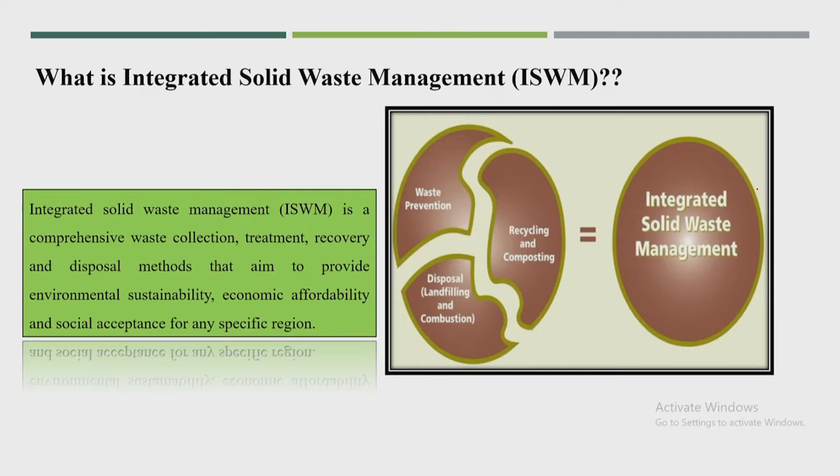First, what is the meaning of integrated solid waste management? It is a comprehensive waste collection, treatment, recovery and disposal method that aims to provide environmental sustainability, economic affordability, and social acceptance for any specific region. So these are a few important ideas about integrated solid waste management.

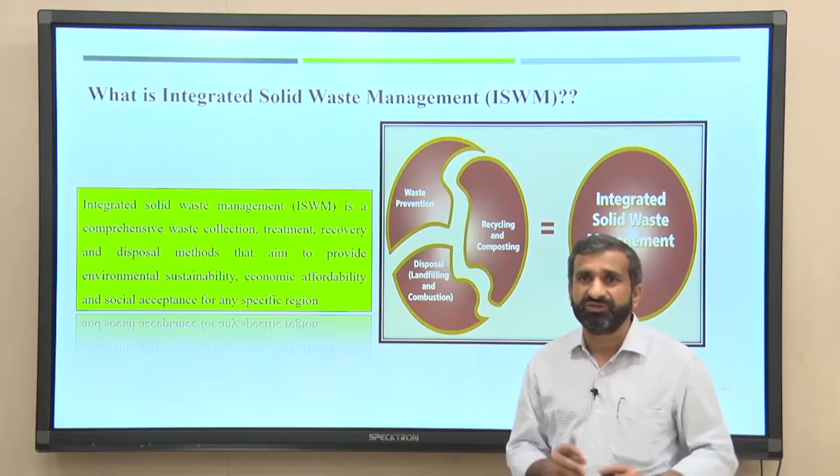It includes all the physical elements of municipal solid waste management based on environmental sustainability and economic viability, and finally it should be accepted by the local areas, socially also it should be accepted. This is called the integrated solid waste management system.

When you talk about the idea of integrated solid waste management strategy, it includes the entire issues about the solid waste management system, starting from the cultural, technical, economic, social context, and after that it also includes the waste material, what kind of sources, and different stakeholders.

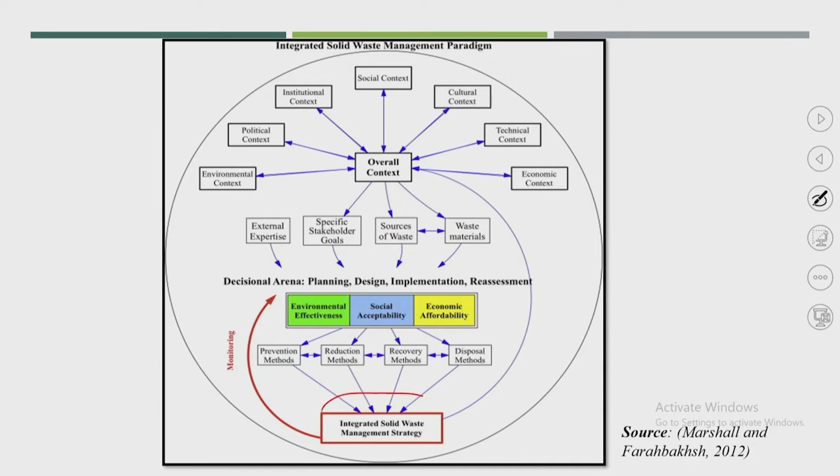Finally, it will go to the planning, designing, or implementation of the integrated solid waste management plan, and that has to be accepted on three bases: environmental, social and economic constraints. Based on that, how best we can prevent the waste, reduce the waste, recover, or dispose the waste, that is normally called the integrated solid waste strategy.

So what is the ISWM or integrated solid waste management planning process? Normally it will start from identifying the need, reviewing the existing system, reviewing the existing regulations available in the particular region, city or state, and then organizing the decision making framework by calling the different stakeholders, and then finally establishing the objective.

Once the objective is finalized, try to identify the potential component. Once the objective comes up, we can go for treatment processes like biological or chemical treatment. Then see the potential component of that, compare the different options available, and based on that develop the integrated solid waste management plan.

Once the plan is ready, try to implement it as best as possible, and then evaluate the complete waste management system. If you are not achieving the particular objective, or it is not possible to achieve, then again go through the same process. So likewise we can proceed for integrated solid waste planning.

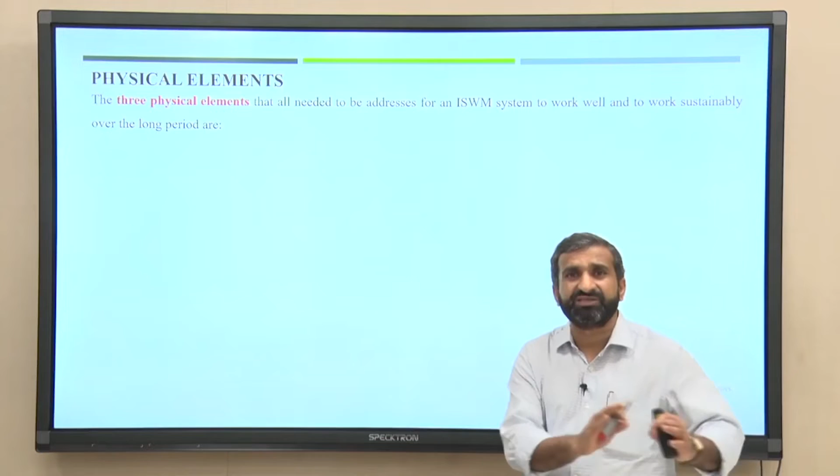Now, when you talk about the integrated solid waste management plan, system or strategy, normally we discuss 3 physical elements and 3 governance features. So there are 6 features or elements that need to be discussed under the integrated solid waste management plan, strategy or process. First we will start with the physical elements.

There are 3 physical elements that need to be addressed. The first is public health. Now, the benefit of ISWM is normally called proper collection. But rather than calling it collection, why not call it public health? So the objective could be how best we can protect the public health of the local people.

So how we can maintain public health properly by maintaining healthy conditions in urban locations, particularly through good collection services. Suppose house to house collection systems are available, as started in the Swachh Bharat mission - that is the best kind of primary and secondary collection. But if you have poor collection or storage, it is not good, and because of that lot of public health issues will come up.

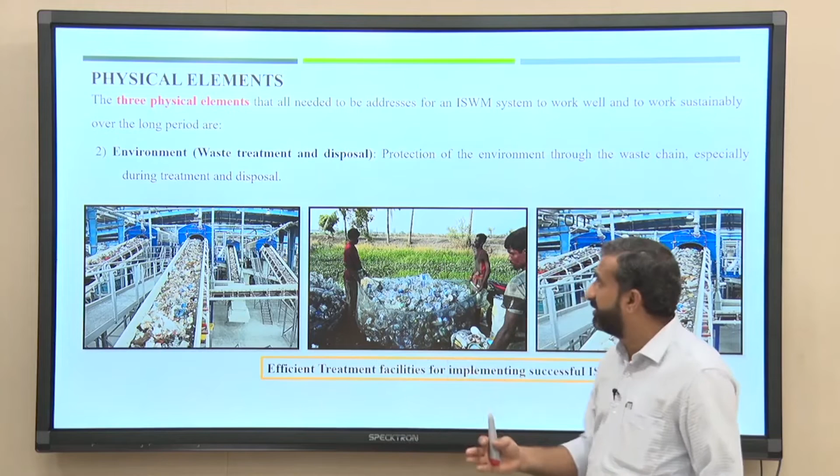Next is the environment - how best we can maintain it. This environmental condition will be maintained specially by waste management, waste treatment and disposal. If you are able to treat properly all kinds of collected waste and also dispose of the entire waste properly, then it is good for the environmental conditions in the local area, protecting the environment through the waste chain, especially during treatment and disposal.

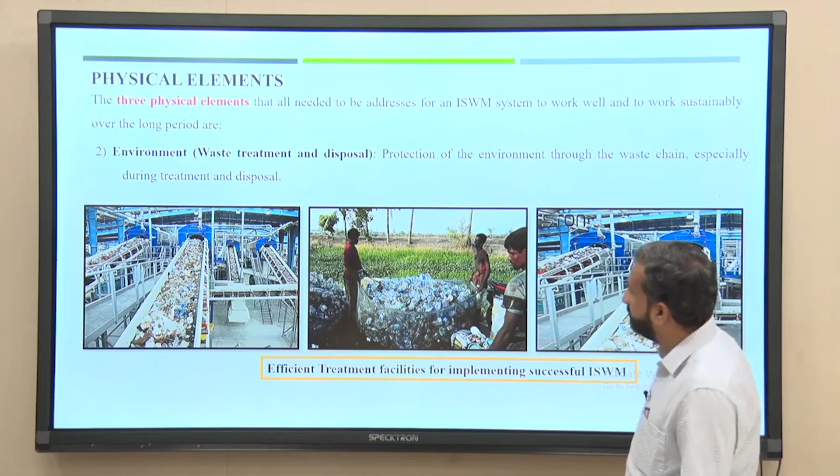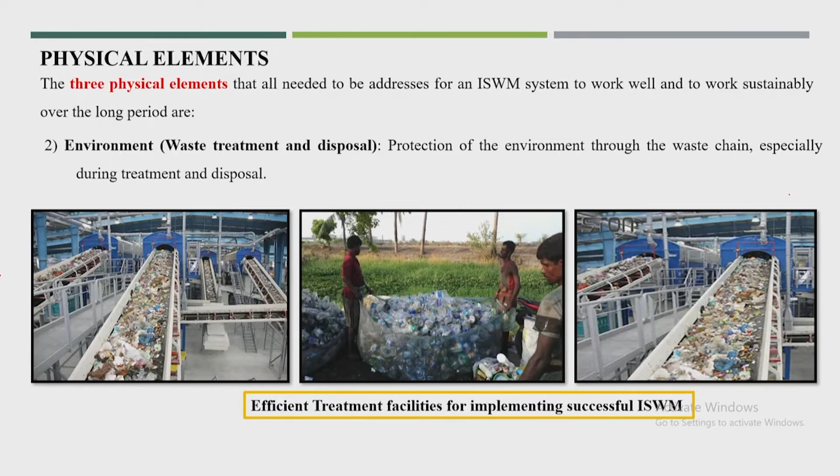So if you have proper recycling processes, which I showed in some photographs, proper treatment processes, proper sanitary landfill facilities available in the city, then we can easily maintain the environmental condition in the local area.

And the third point is resource management. This is also one of the most important physical elements of ISWM, and this resource management could be possible through proper recycling of dry waste and also getting products from organic material.

In this, if you talk about the 4 R's, normally we know the 3 R's which I am showing in the next slide. The 4th R is about closing the loop by returning both material and nutrient to beneficial use, through preventing waste and striving for a high rate of organic recovery, reuse and recycling.

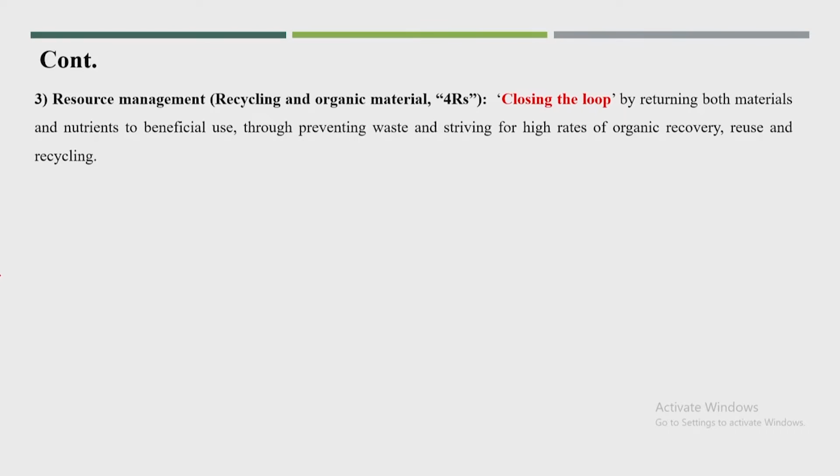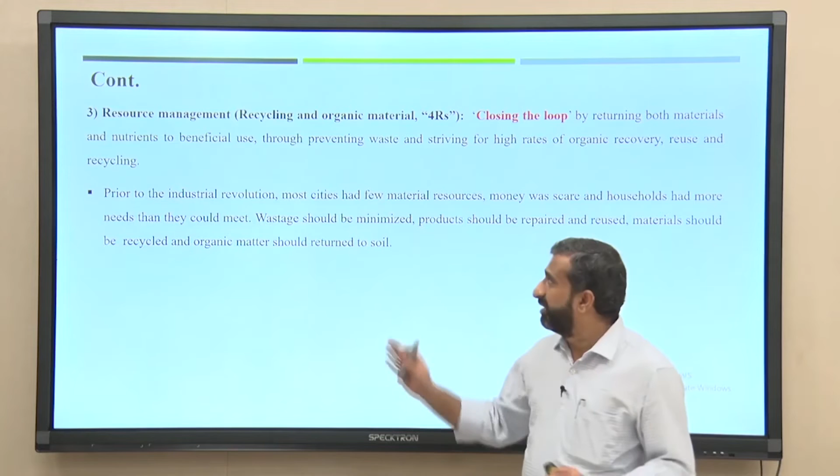These physical elements - normally when you talk about the solid waste management plan, we talk about collection, treatment, and disposal. But these physical elements are not complete until you talk about resource management, because there is a lot of material that is recyclable, and a lot of material can be treated to get a product out of it. That is the important one.

Now when you talk about treatment, always think about how best you can get some kind of resource out of it. For example, most dry matter like metal, glass, paper, rubber, leather is recyclable, and becomes a very good resource. Most of these materials are also combustible, so you can get energy out of that - that is also another very good product or resource that will be generated.

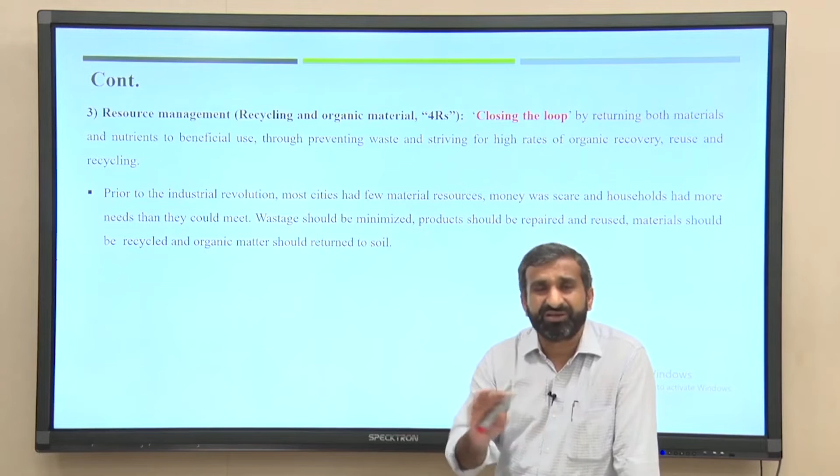And when you talk about biological treatment processes, in composting we will get very good quality compost if you manage a proper composting plant. In anaerobic digestion, you will be able to produce methane gas - this is also a very good renewable energy we can produce from the anaerobic digestion process. So almost all treatment processes or recycling processes will be able to produce a resource.

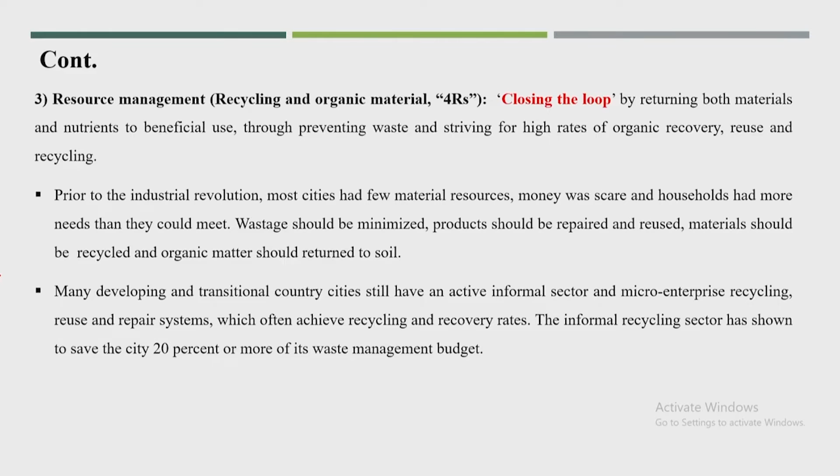Normally this resource management in most cities is not done by the formal sectors like the corporation, because they are all busy with collection and disposal only, and that kind of fund is also not available with them. But with the Swachh Bharat mission, most cities got a good amount of fund, so we will see many cities come up with treatment facilities or proper disposal facilities.

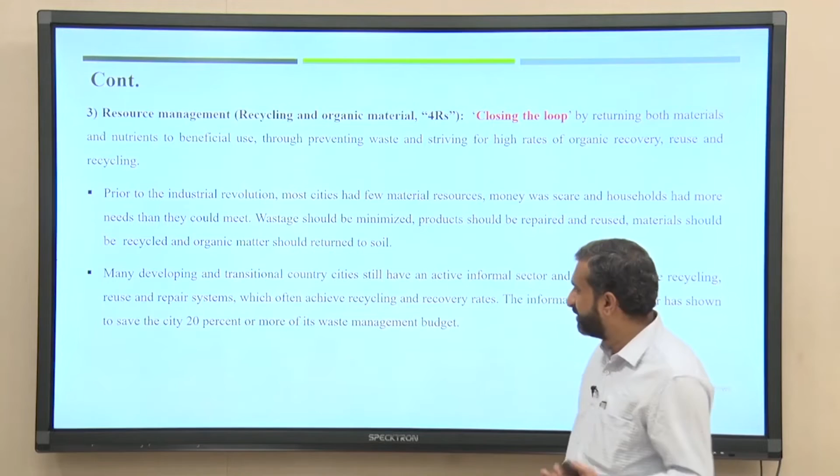But right now the informal recycling sector saves around 20% of the waste management budget, because there are a number of recycling facilities available from the informal sectors.

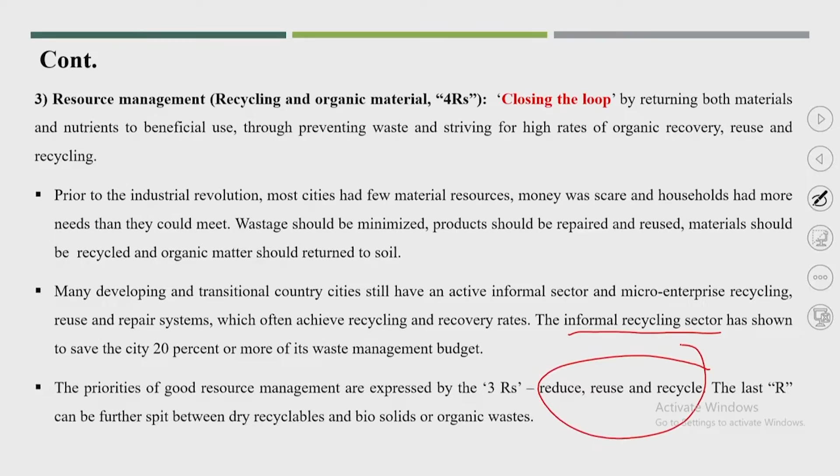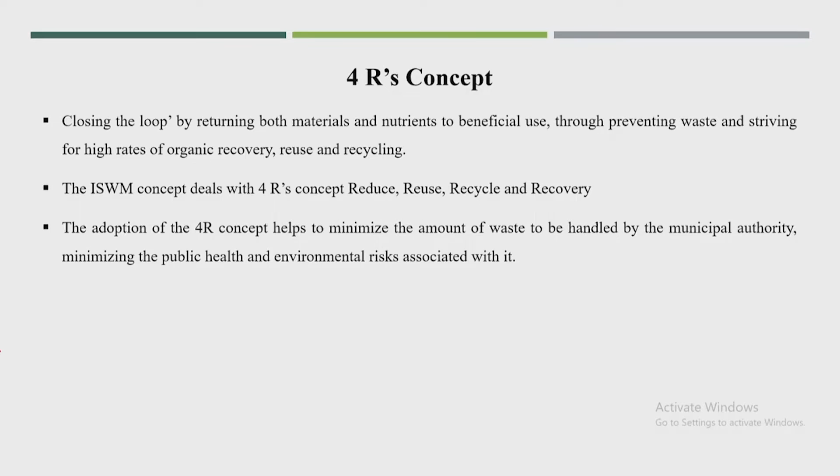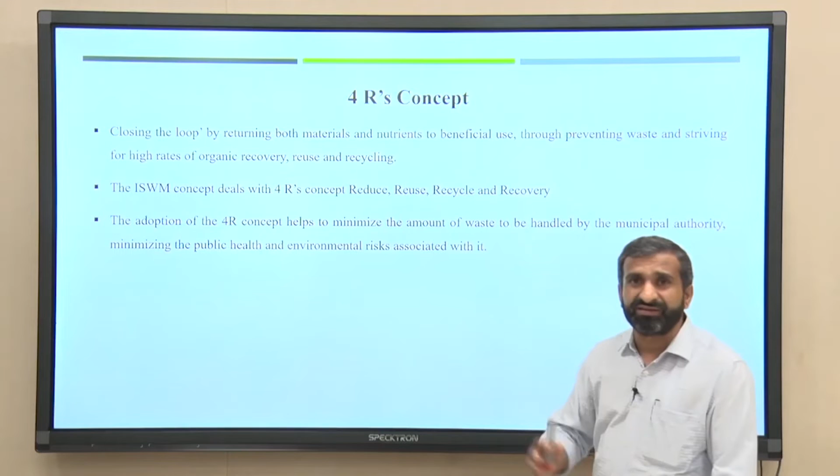So the 3 R's are reduce, reuse, recycle - that is the 4 R concept. Normally this 4th R is specially given for developing countries, especially like India - closing the loop by returning both material and nutrient to beneficial use. So the 4 R's: first is reduce as much as possible, reuse as much as possible, and recycle. And the 4th R specially closes the loop by returning material or nutrient to beneficial use - this R is specially, in many textbooks you will find, written as recovery.

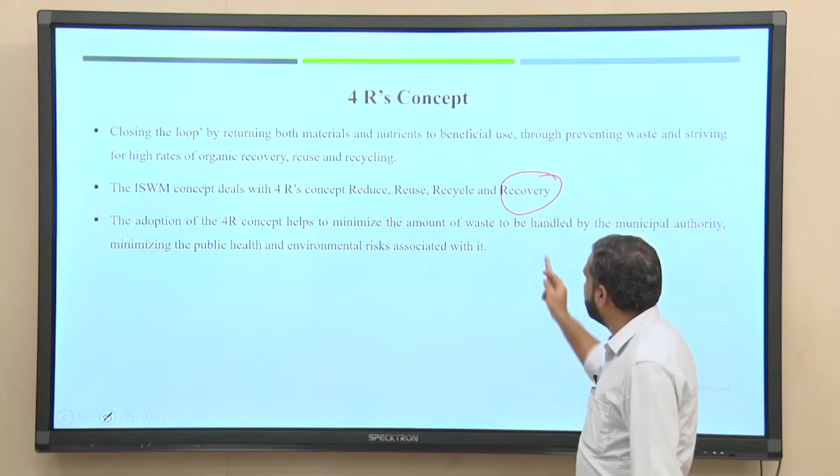I put it here because most textbooks have this as recovery, but recycle is also one kind of recovery. Rather, the important thought for developing countries like India is that R stands for return nutrients to soil. I think that is the best word for R.

What is the definition of return nutrients to soil? How will the nutrients be returned to the soil? By producing compost from wet waste. This compost has lots of nutrients, and these nutrients get returned to the soil, because the same waste was generated from the soil, and nutrients were taken from the soil to become food for humans. So why not return the same nutrients to the soil?

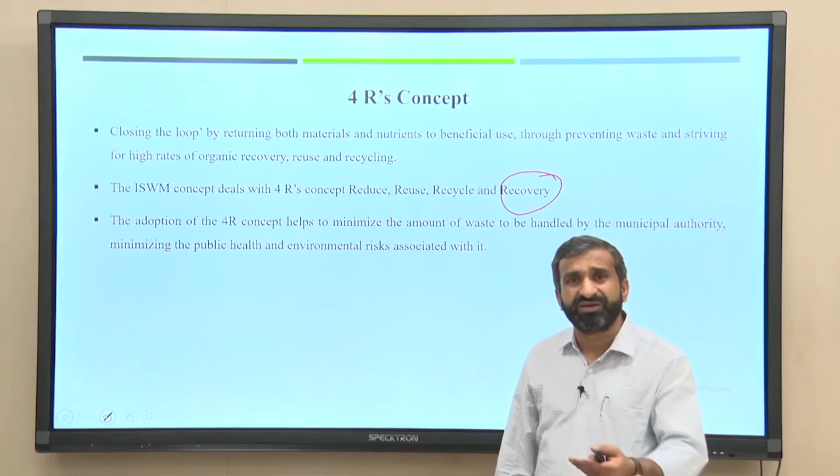This is a good idea for developing countries like India, even South Asian countries or African countries. This kind of idea is very important to propose. So it's reduce, reuse, recycle, and return nutrients to soil. By composting we can easily return these nutrients to the soil, and it will close the entire loop.

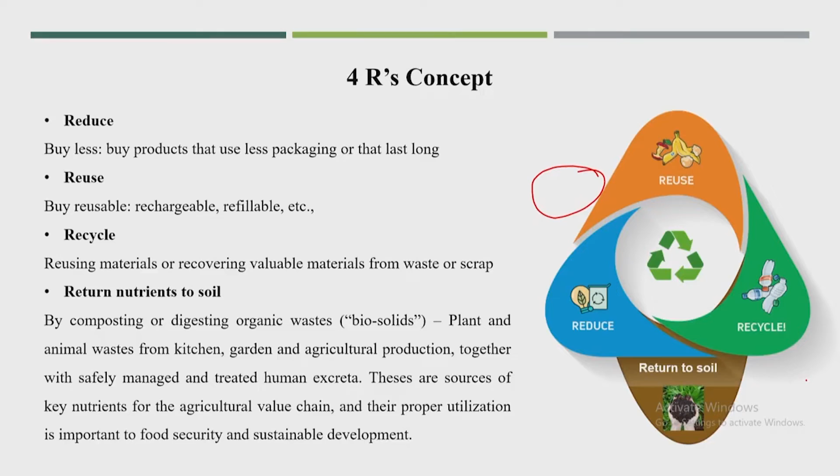Now, the governance features - there are three governance features. The governance strategy to deliver a well-functioning system of ISWM until the 1990s would probably have been framed primarily around technology, but there is a need for governance and government participation also, and some governance features are important.

Even in the 90s we always talked about technology - we required special technology for treatment of mixed waste. We never used to talk about governance features being important for a proper management system. So this is good waste governance - there are three major governance features. First is inclusive, providing transparent space for stakeholders to contribute as users. Next is financial sustainability, and third is sound institutions and proactive policies.

Now understand that whatever plan you make, it should be inclusive. What is the meaning of inclusive? It means it should be contributed to by all the stakeholders. This is one of the very important points.

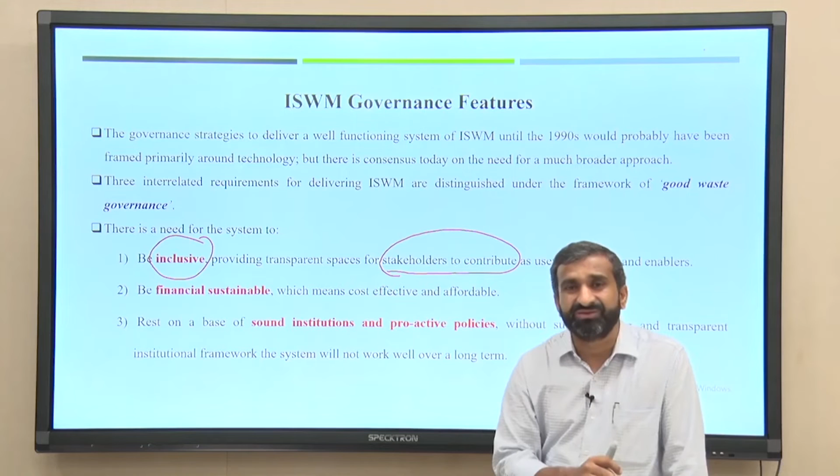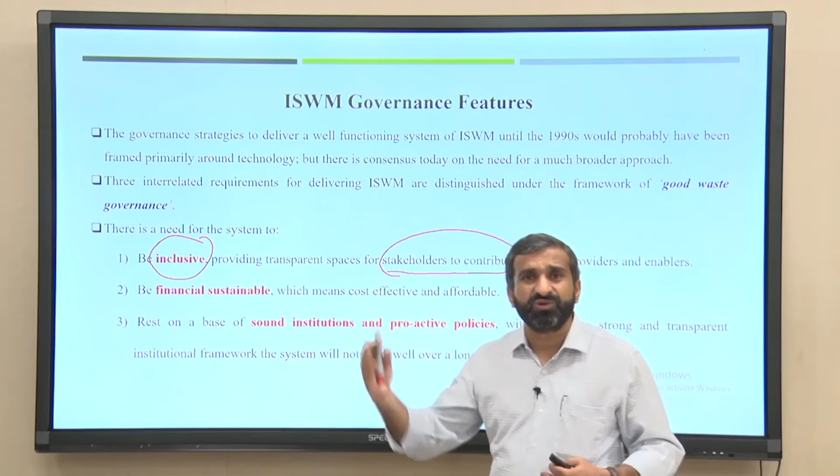So you require this, and the problem is that a lot of manpower is involved in solid waste management programs, but is that manpower skilled? No, they are learning by working in the plants, so they do not have skill. For skill you require special institutions to create skill in that manpower, and we also require special proactive policies, so that every year some fund gets to the local authority. It's not that once in 15 or 20 years you give one capital fund, maybe a few crores, and ask the local authority to start some plants and run it for the next 20 years - that is not possible, because continuous funding also should be available. Until the local authority achieves sustainability, you need to fund them, and particular policy should be required.

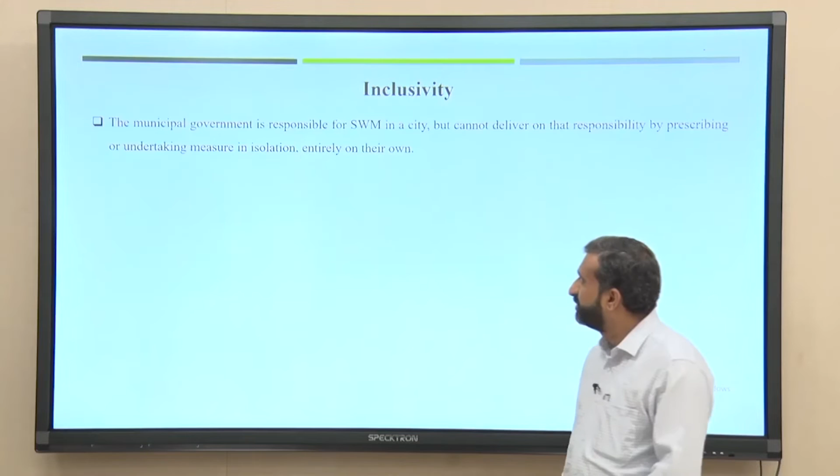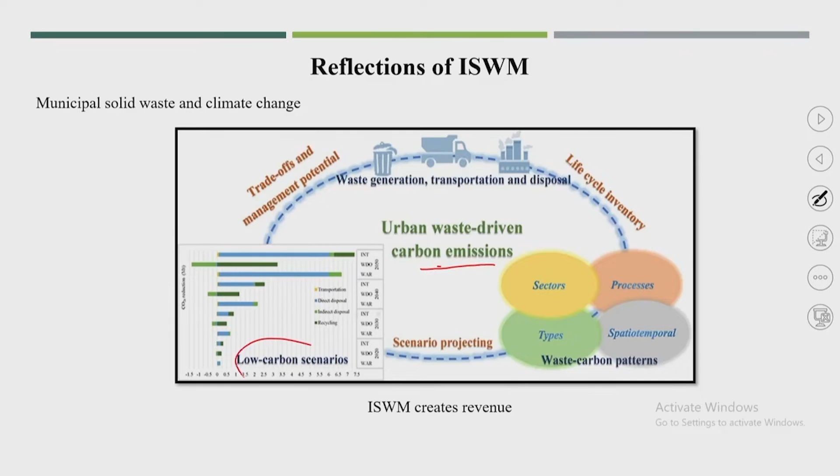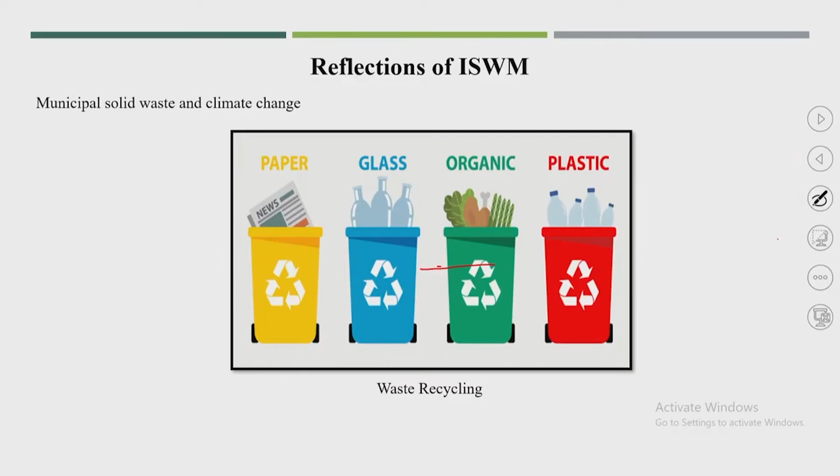Now there are some reflections of ISWM with municipal solid waste management and with climate change also. Obviously, if you have a proper solid waste management plan or integrated solid waste management plan, you can reduce carbon emissions, and because of that we can get a lot of fund by the low carbon scenario, and through waste recycling. So we can maintain proper climate change mitigation by waste recycling, by capturing landfill gas, so that it will not create problems for the environment.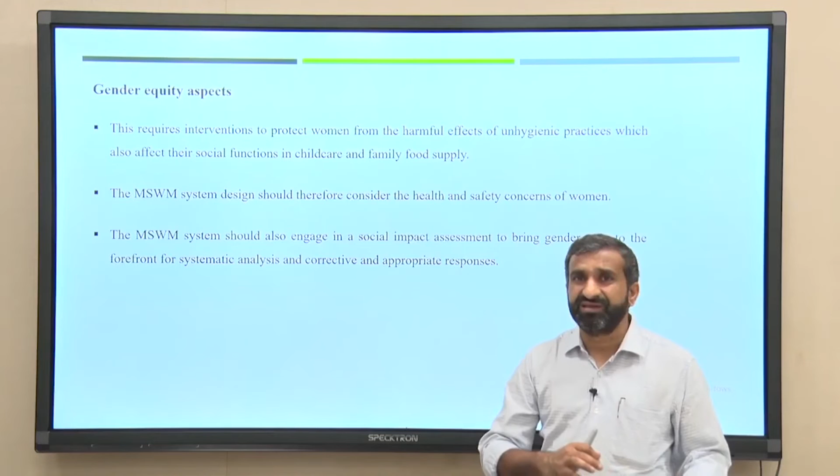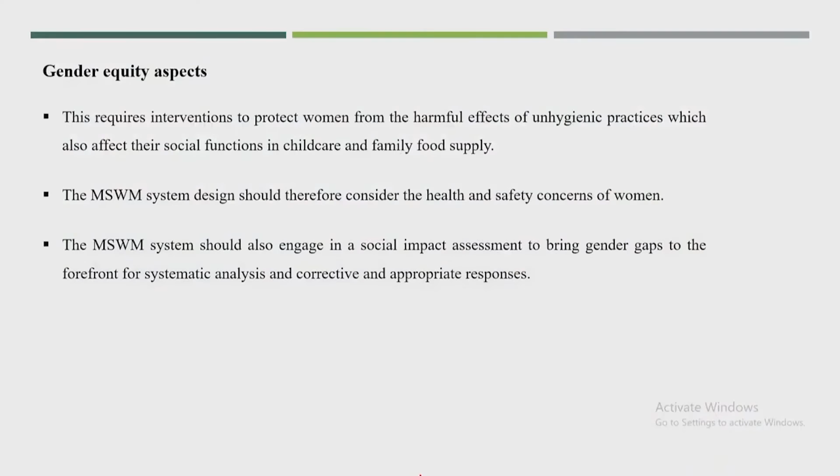Now this slide is for gender equity aspects. I keep this slide here because in the informal sector, especially, you see a number of females working in solid waste management, and even kids are working in the solid waste management system. So under integrated solid waste management, it needs to be designed in such a way that proper gender equity aspects can be maintained. It should not be that only males work for waste management and females don't, or that only females work for street sweeping and are not allowed at disposal sites. It should not be like that - try to maintain female equity, since there are a number of manpower working in solid waste management projects.

Similarly, the informal sector integration - this we have also seen in the governance features, inclusive. So inclusive is not only government participation, or government companies or government authorities participating only, but also the informal sector should be integrated, like NGOs, CBOs (community based organizations), self-help groups, some private sector. Now in 2006 when these PPP projects started under the JNNURM program, this discussion had also started.

So when you say PPP projects, it means public private partnership. Public means a local authority or local government, and private means a private company. Now when this discussion had been extended, the question came up: is this collaboration only between the corporation and the private company? What is the role of other stakeholders like generators, household people, or enablers? They also need to be included.

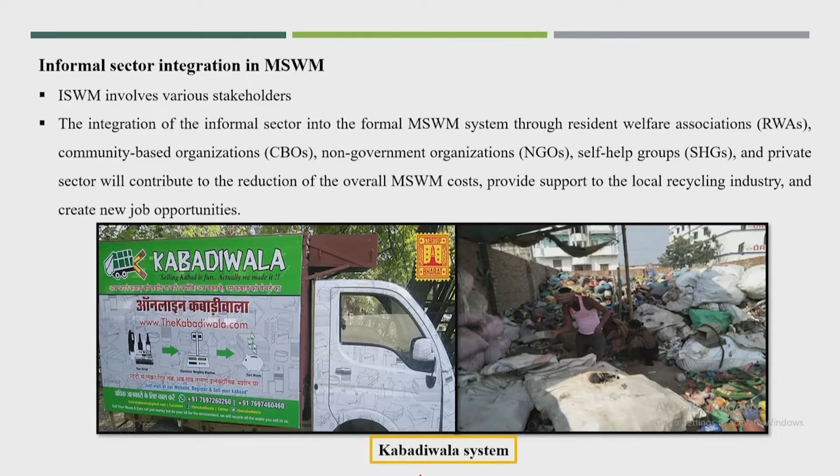So likewise, here the kabadiwala system - there are a number of kabadiwalas. Why not include such people as well? Also, there's news that waste pickers held a public hearing to raise issues.

Now, when you talk about the hierarchy of integrated solid waste management, what should that hierarchy be? This is the most preferred to least preferred hierarchy for an integrated solid waste management plan. First is source reduction and reuse - this is the most preferred point, followed by recycling. When you make a plan, first think about how best to reduce or reuse the waste. That should be the first thought for local authorities when planning for solid waste management.

Then, how best they can go for recycling of all valuable matter. Once whatever is possible to reduce, reuse and recycle is done, then you talk about composting - taking out biological waste for composting, or biogas facility, anaerobic digestion. Then finally go for waste to energy if possible, from which we can get some energy - even biomethanation or anaerobic digestion can be proposed under waste to energy. Finally, landfilling, which is the least preferred. Whatever is not possible for source reduction, recycling, composting, or waste to energy goes to the landfill area.

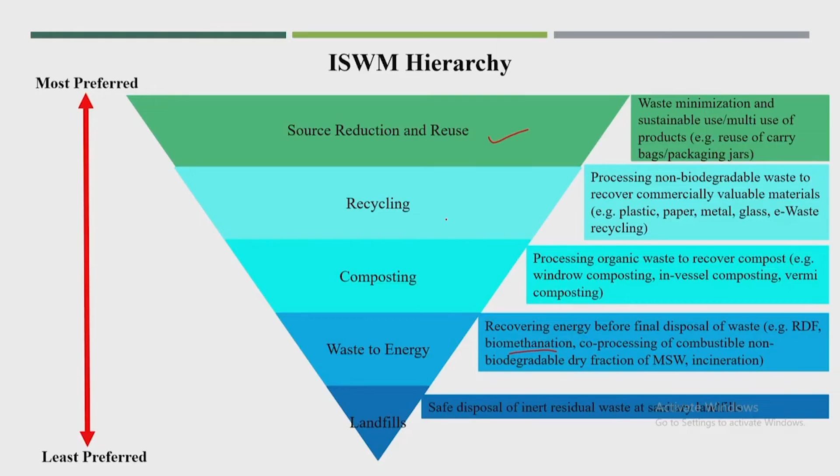That is the proper hierarchy of the integrated solid waste management strategy or plan. But in India, rather than discussing this, we directly go for landfill. So the most preferred option becomes landfill, and then we talk about recycling, composting or waste to energy. That is not a good idea.

If you talk to them about the preparation of a solid waste management plan, many of their staff are not well aware of this kind of plan preparation. So this approach will help those corporations where proper staff are not available to understand, and this way they can come up with a particular plan.

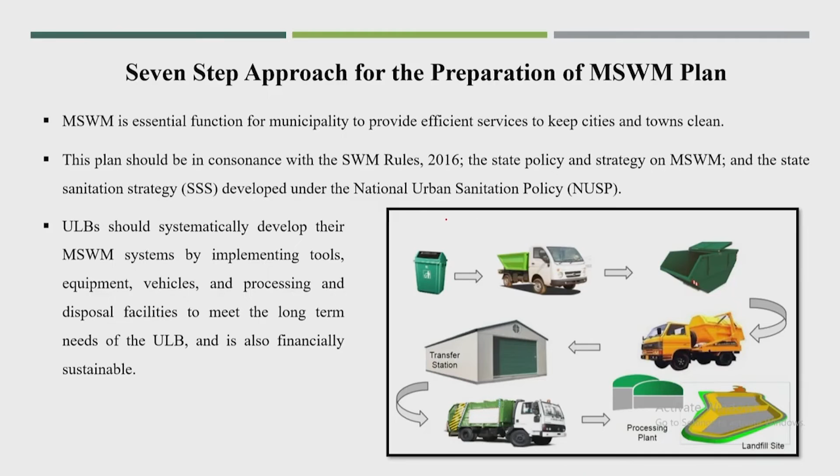These plans should be along with the SWM Rule 2016 and the state sanitation strategy developed under the National Urban Sanitation Policy. So ULBs should systematically develop their MSWM system by implementing tools, equipment, vehicles, processing and disposal facilities to meet the long term need of the ULB, and it should also be financially sustainable. So these are the different steps.

Step 1 is policy, program and legal framework. Step 2 is assessment of current situation and gap analysis, along with the stakeholders given here. In step 1, what will be the stakeholder? In step 2, assessment of current situation, gap analysis - what are the stakeholders or what aspects have to be looked upon in this particular step. Third is...

Step 3 is stakeholder consultation for MSWM planning. So once you come with the assessment, current situation, gap analysis, you come to the stakeholder consultation, and based on the consultation you come up with the preparation of a draft MSWM plan, where with population forecast and different rules and regulations, you can come up with the draft proposal.

Once the draft proposal is ready, they need to go through step 5, schedule for implementation - timeline, manpower, financial viability will be prepared. Once the draft proposal with the schedule is ready, we again go for stakeholder consultation, back to step 3, and have discussion there with all the stakeholders. Once everything is accepted by all stakeholders, we go to step 7, municipal council approval for the MSWM plan and implementation, including PPP.

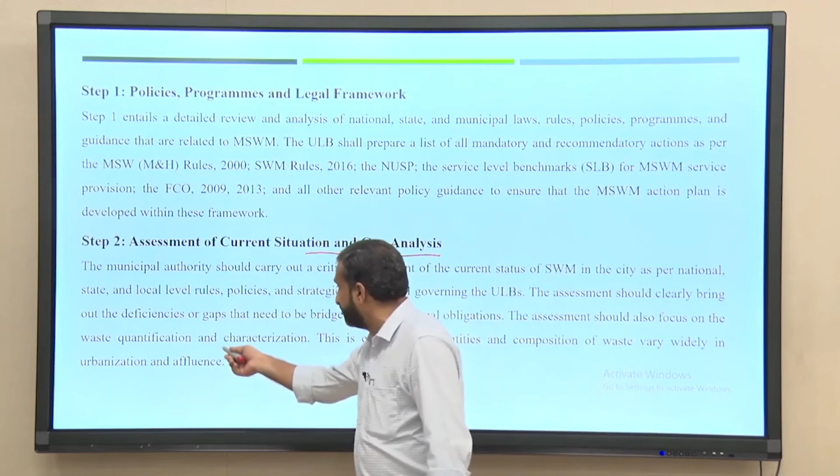To assess the current situation and gap analysis, I particularly believe each corporation needs to talk with some experts - these could be from private industries or from academic institutes. There are a number of academic professors in IITs, NITs, or other central or state colleges where researchers are working. I believe this is needed because a lot of data has to be collected, and quantification and characterization studies have to be performed in this particular step. Otherwise it is very difficult to understand what the current situation is, gap analysis is not possible, and the characterization also becomes very difficult.

We had one module on characterization. So obviously, if the local authority involves some academic faculty or professors, it is good for them also - a lot of discussions and new understanding will come up in this step. Once step 2 is known, we can go to stakeholder consultation and tell them: this is what the current situation is, and as per current situation, we come up with particular gaps.

Gaps could be like, we do not have a treatment facility, we do not have a sanitary landfill available, and the current situation shows the waste is highly biological in nature, which could produce good quality product through composting or biological treatment facility, and we also require a special facility for the sanitary landfill.

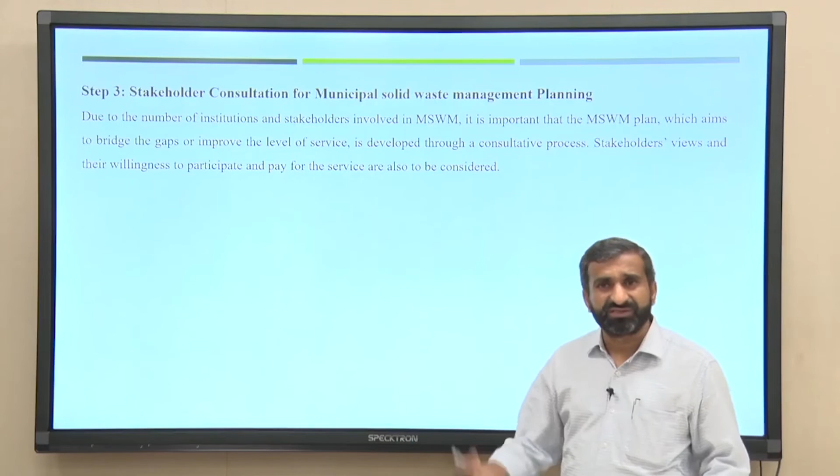Likewise, we can share with the stakeholders and have discussion with them, and once the discussion is over, we can come up with a draft municipal solid waste management plan. This draft plan can be prepared by sitting with all technical people in the corporations, or with some outside academicians or researchers, who could also participate in the preparation of the draft proposal.

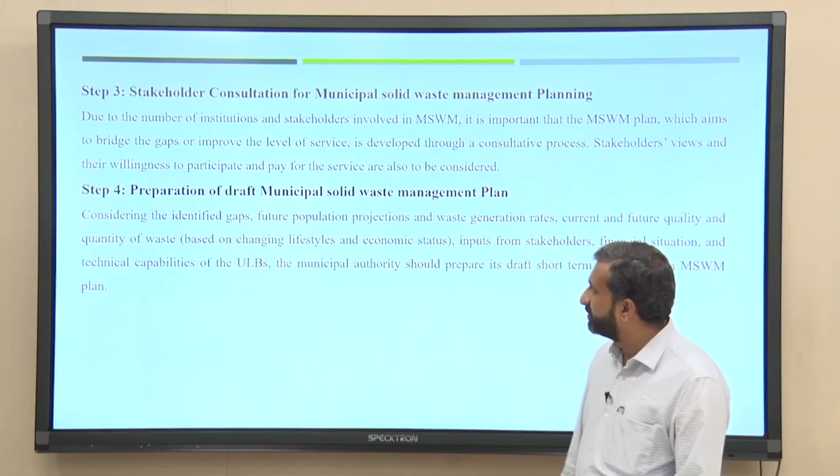Then we create the schedule for implementation, because the timeline, financial viability, and manpower requirement have to be discussed. Once that is over, we again go to the same stakeholder consultation and share with them what has been the thought that came up in the proposal. For example, when planning for an incineration facility, you need to also look upon and talk about the stakeholders.

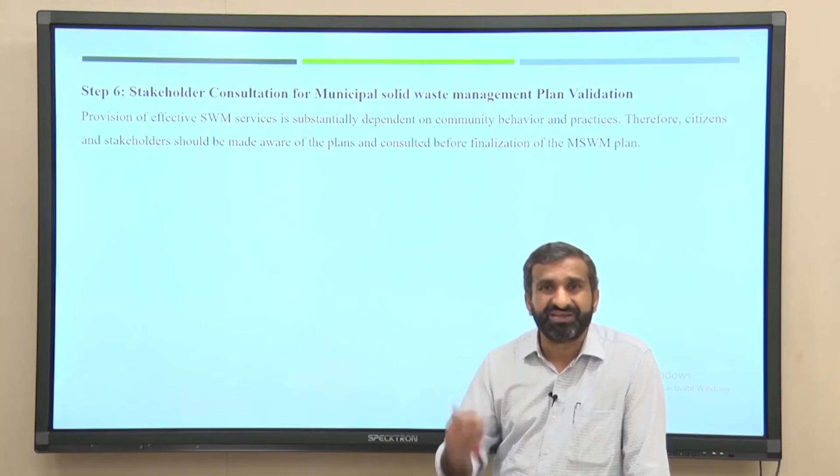If they start some incineration facility, all the recyclable matters will not be able to be collected. So they may oppose it, or may not find it much beneficial, and again we will go back to the draft proposal preparation. Likewise, we can go again and again having the stakeholder discussion. That is why step 3 and step 6 are specially given for stakeholder discussions, so that every time whatever proposal comes up, you have discussion with the stakeholders.

Finally, once the stakeholders accept all the points or whatever proposal has been created by the local authority, it will go to the municipal council for approval of the solid waste management plan, and finally this plan will be accepted and implemented. So this is the best way to prepare the solid waste management plan.

Now the role of state and regional level authorities: the secretary in charge of the urban development department of the concerned state or union territory has overall responsibility for the implementation of the MSWM system in cities and towns, in line with the SWM rules. This same urban development department is required to prepare a state policy strategy for the MSWM plan, and has to report to the state bodies for SWM service provision, and the ULB reports to the Ministry of Urban Development. The same UDD is also responsible for approval of land transfer from the state to the ULB.

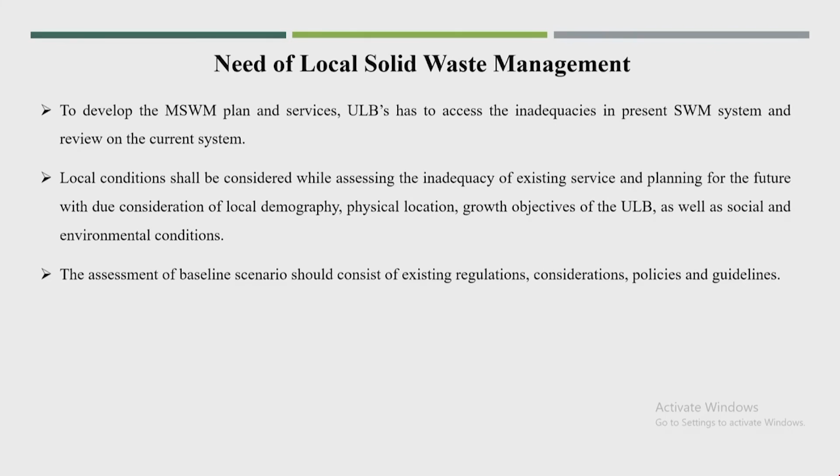To develop an MSWM plan and service, the ULB has to assess the inadequacy in the present SWM system and review the current system. Local conditions shall be considered while assessing the inadequacy of existing services, and the idea is local. What is the meaning of local solid waste management? It again depends upon the local conditions, the geological or climatic condition, like take the example of the northeast part of India.

Where rain occurs for more than 6 months, somewhere even 8 months in a year, or hilly conditions, especially in Meghalaya or Arunachal Pradesh. In that case, whatever priority exists in other parts of India, in the plain areas, where they can have very big sanitary landfills or very big composting facilities in open areas, is it possible to do the same in these kinds of areas?

No, local conditions mean that with 8 months of rain, you can't have a landfill. It is very difficult because your groundwater table will be very high, so it is very difficult to have sanitary landfills in such areas. Even where sanitary landfills exist, their type will be different in hilly regions. We can't go for simple excavation or area methods.

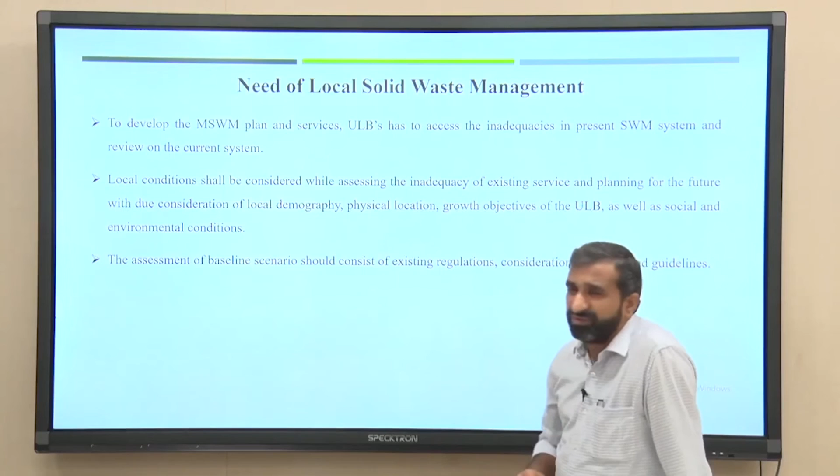We have to go for depression kind of landfills, but there also, if you have the landfill in the hilly areas, there are a lot of leachate production and pollution. In both cases, local conditions say more treatment facility should be provided. Rather than looking at other states in other parts of India, they need not have similar kind of facilities.

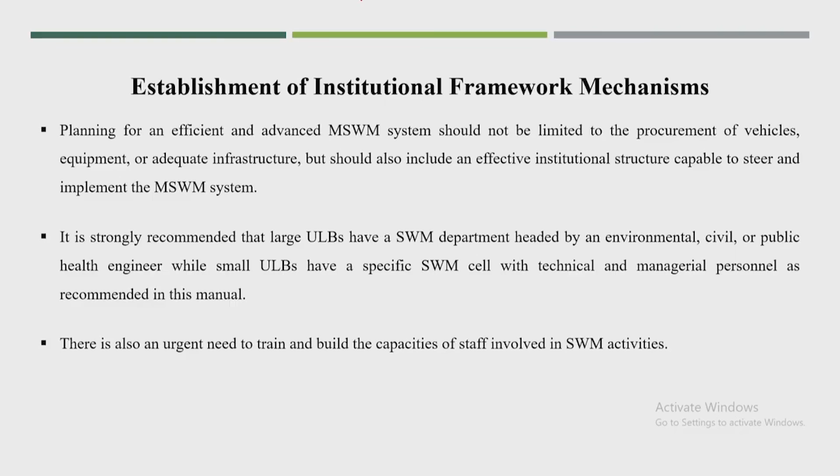Now, the establishment of institutional framework mechanisms. Planning for an efficient and advanced MSWM system should not be limited to procurement of vehicles, equipment, and adequate infrastructure, but should also include an effective institutional structure capable of steering and implementing the MSWM system. It is strongly recommended that large ULBs have an SWM department headed by an environmental, civil, or public health engineer, while small ULBs have a specific SWM cell with technical and managerial personnel, as recommended in this manual. There is also an urgent need to train and build the capacities of staff involved in SWM activity, and adequate and appropriate personal protective equipment should be provided to all employees or workers.

Now the institutional framework should have proper goals, principles and mechanisms. The goal should be that the municipality is responsible for waste collection and disposal, protection of environmental quality, health conditions, and value for money in service quality. The principle should be accountability for delivery and quality of service, and transparent, well-defined responsibility. The mechanism should be decentralization, delegation, professionalization, or supervision. We can achieve the particular goal by having proper principles.

So I think whatever plan or strategy we are making for solid waste management should include the understanding of integrated solid waste management strategies. By that we will be able to achieve proper environmental conditions or proper living conditions in the city while managing, disposing, and treating solid waste in a particular region. So, thank you.